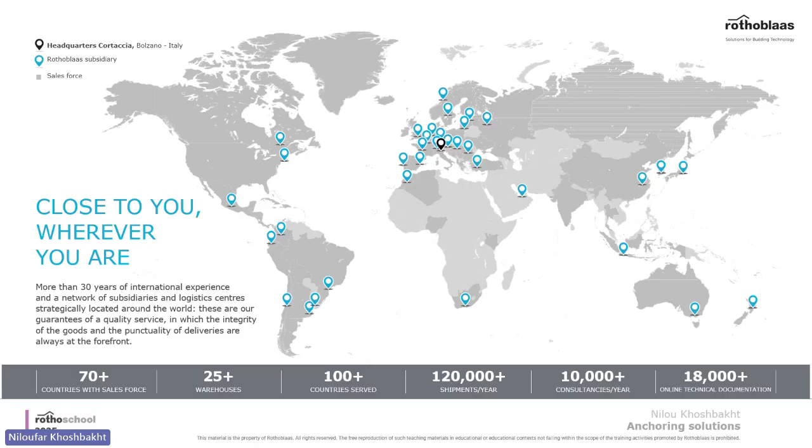A little bit about our company. We are providing solutions for mass timber construction all around the world. We have 25 plus warehouses serving more than 100 countries with our team of engineers and sales force. Specifically in North America, we have more than 1,000 clients, serving 60 states and provinces in Canada and US with 2 warehouses. If you want to learn more about the major projects we've touched in North America, you can go to Wood Innovation Network and search our name there.

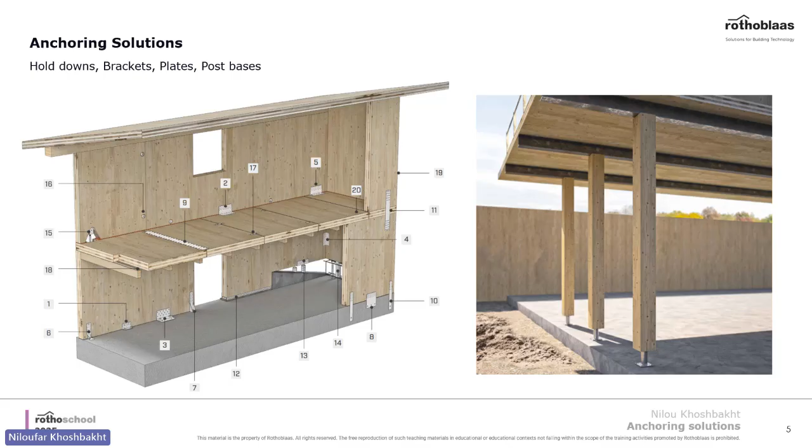Today we're talking about anchoring solutions: hold downs, brackets, plates, post bases, all means of connecting mass timber structures to the ground. Here's the outline for today. We'll talk about why proper anchoring is crucial, then about 5 types of anchors for mass timber, and a bit about Rothoblaas hold downs, brackets, and post bases, and some of our innovative ground connection systems.

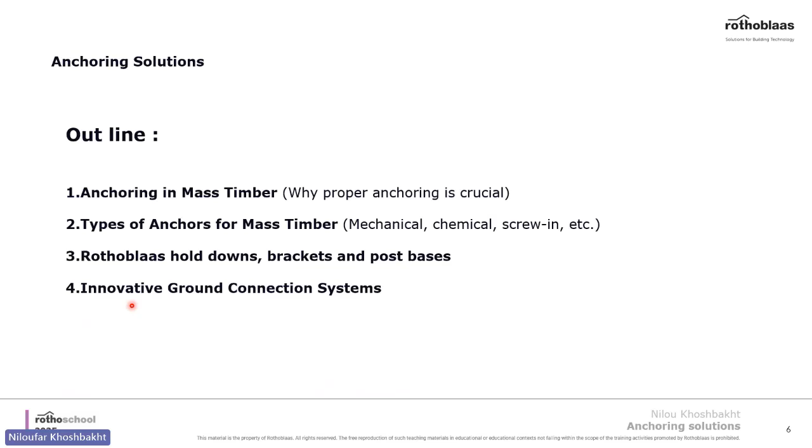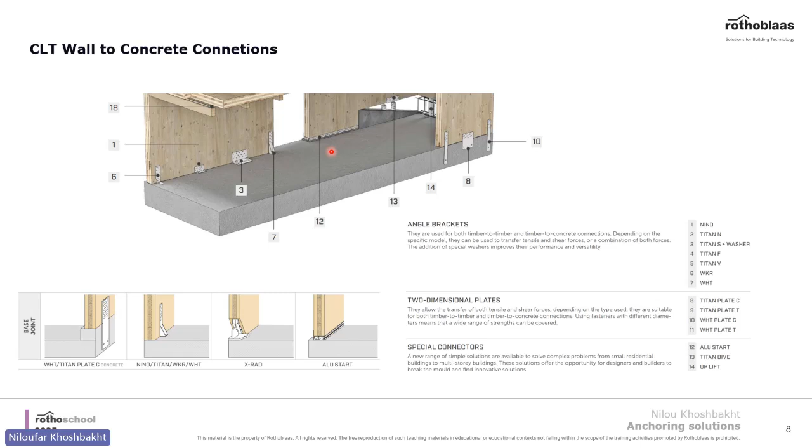We have a range of products for connecting CLT walls to the ground: angle brackets, hold downs like WKR, Titan plates and WHT plates, and some of our innovative ones like ALUSTART. We also have advanced innovative solutions like Uplift and Titan Dive that I will discuss at the end of the webinar.

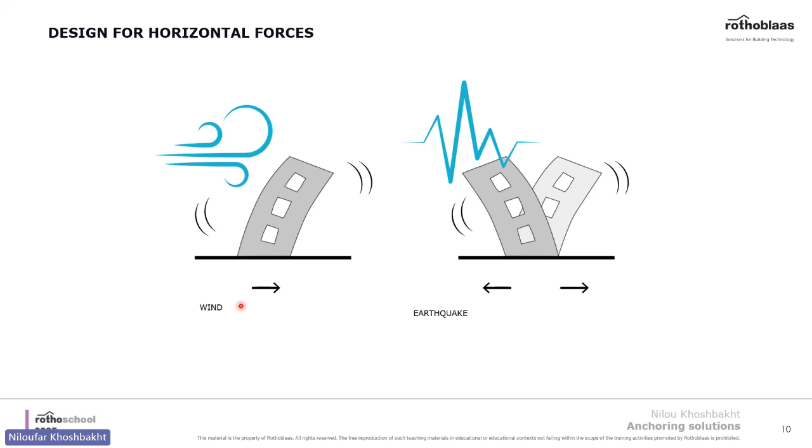But first, let's start with design for horizontal forces. This is a basic concept, not only in mass timber construction but in construction in general. When a structure is subjected to horizontal forces, like wind and earthquake, there are different ways the building could fail. We're not going to discuss how to brace the building; today our focus will be on the connection to the floor.

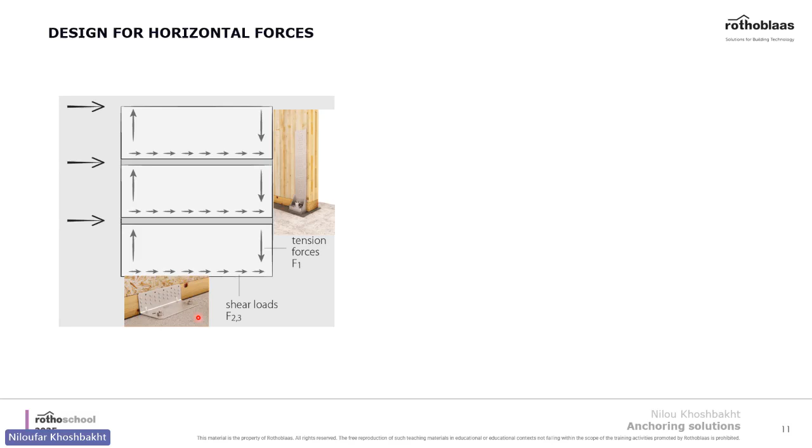For connecting to the foundation, the horizontal forces will be translated into moment, which in the end becomes shear forces on the floor or tensile forces. We resist tensile forces with hold downs and shear loads usually with brackets.

This picture shows a standard approach that's been around for a while, developed for light frame structures, where you just use tensile hold downs specifically for tension and shear brackets for resisting shear forces. This is a legacy system adapted from light frame buildings, and it works in theory.

But in practice, here's some experimental results from Gavric et al. As you see, these angle brackets not only withstand shear but also almost withstand tensile forces. Or even for the tensile hold downs, they just take a little bit of shear, as you see here.

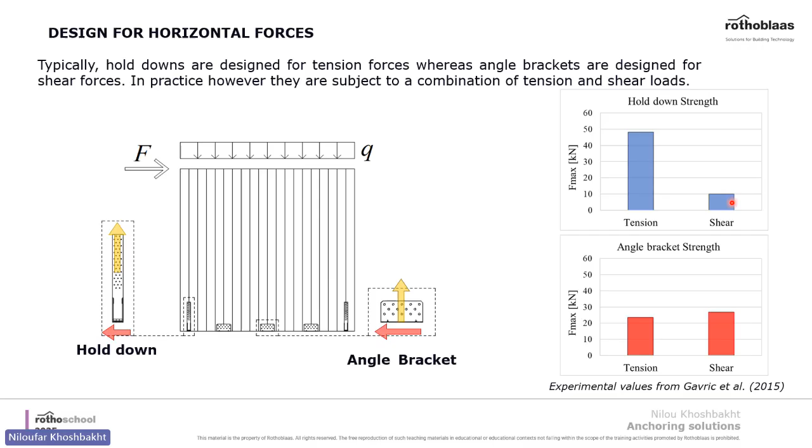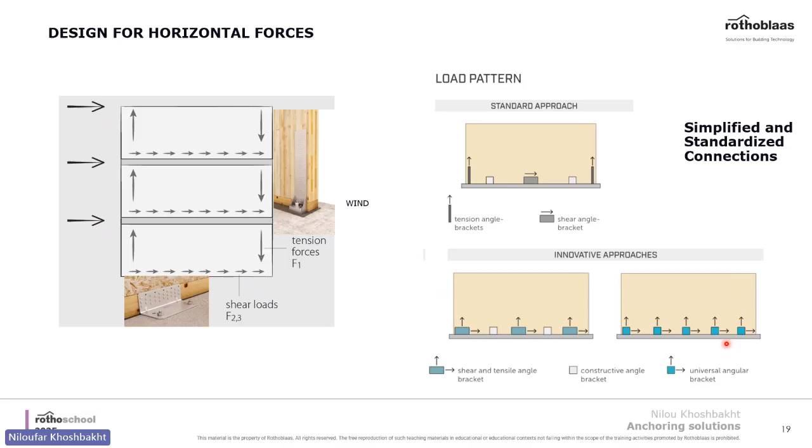That's why we moved to more innovative approaches in which angle brackets are optimized to take both shear and tensile forces. We've conducted several testing campaigns to develop new products, which I'll discuss shortly.

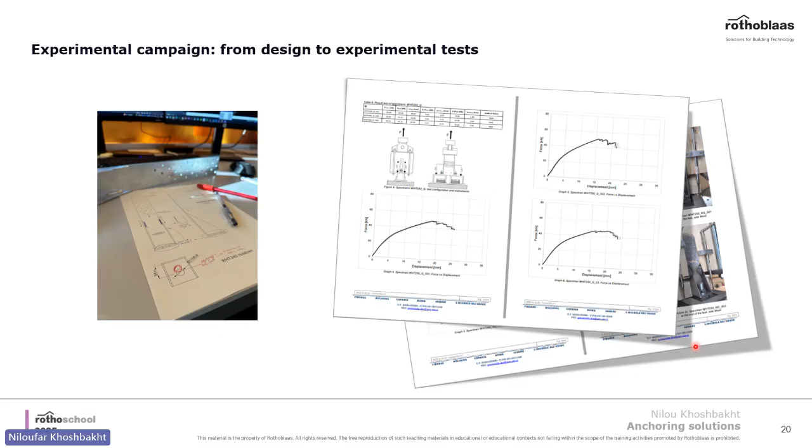But before that, I'd like to provide a bit of context regarding the design of hold downs. As you might remember from my previous webinar, a connection system is like a chain made of ductile and brittle components. We discussed the importance of the ductility layer before. I just want to emphasize we always want the screw in timber to fail first and be the ductile part of this chain, because if the steel or concrete fails, the whole chain will fall apart and the integrity of the connection won't be maintained.

Here you see an example of breakage on the steel side, and here breakage in concrete. This is the ideal scenario for us, because if the screw yields, the connection doesn't fall apart.

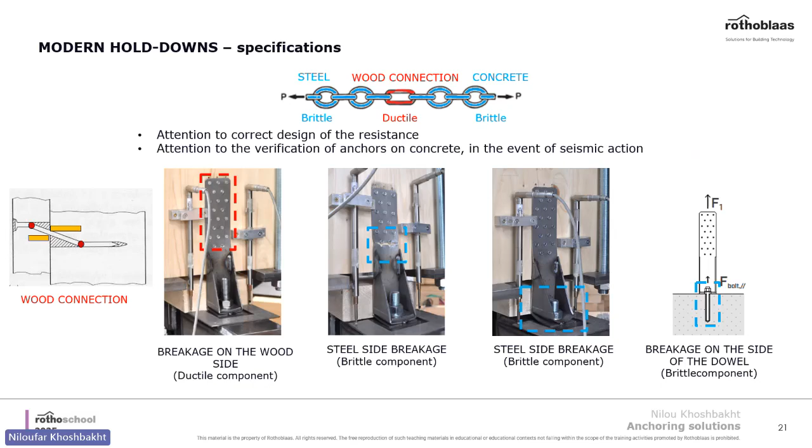This is our basis of the design and testing in Rothoblaas. Speaking of testing, this is just one example. I'm sharing results here for our WKR hold downs, and as you see, the failure happens in the timber side, and it's more of a ductile behavior.

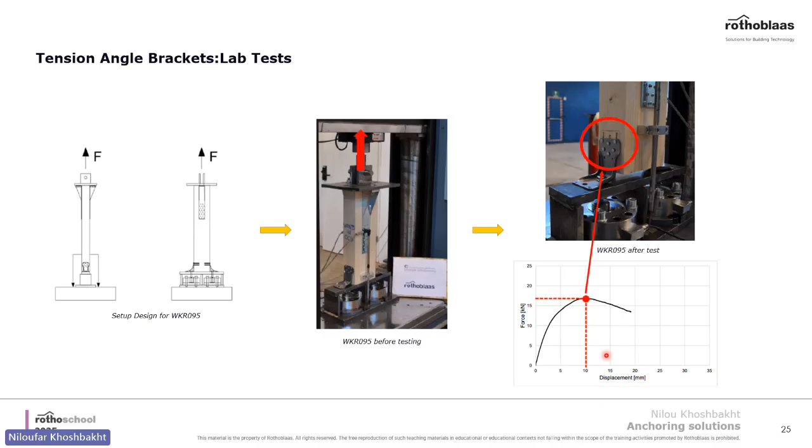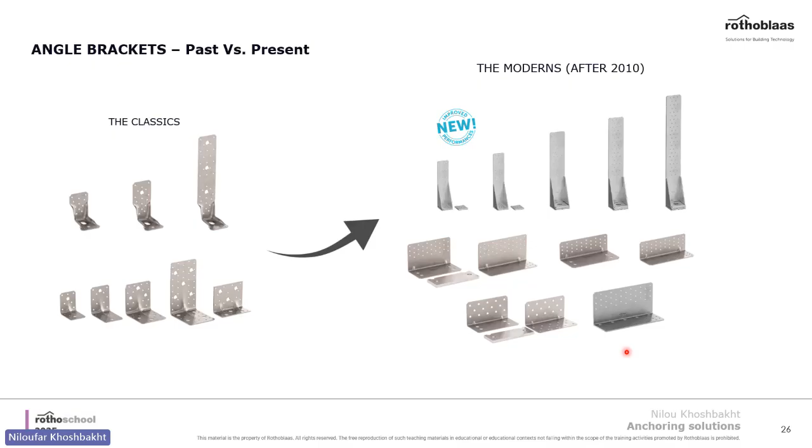What you see here is the classic brackets versus the modern ones. Small angle brackets have always been around, originated just to restrain loads in light framing. These modern brackets were developed by Rothoblaas about 15 years ago, and the performance was improved without getting taller. For example, for shear angle brackets, adding washers as reinforcement, changing the screw, the nail pattern, adding bigger screws, and it's still ongoing research boosting capacity for mass timber application.

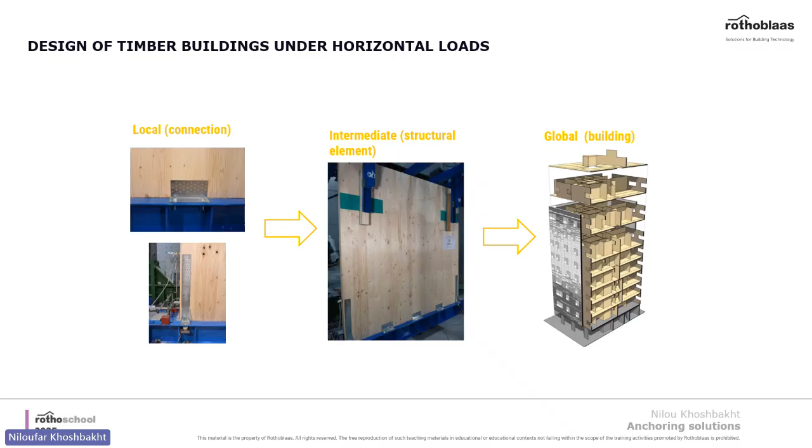We ran several test campaigns collaborating with universities to test the products themselves, both locally and as a structural element, to find a relationship between local and global ductility, which is used by engineers for seismic design.

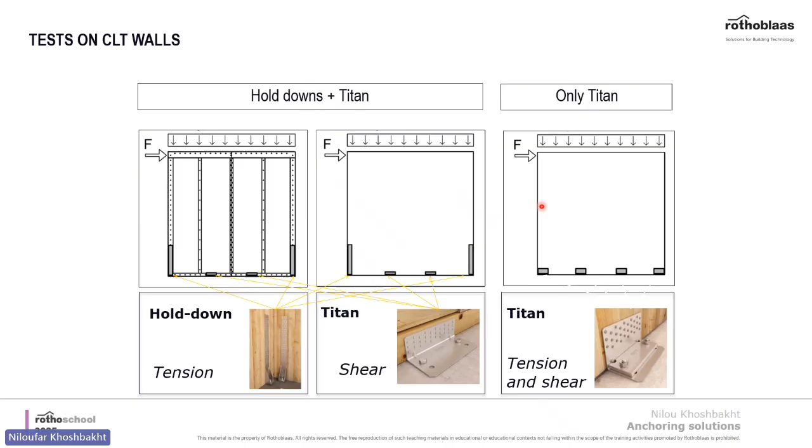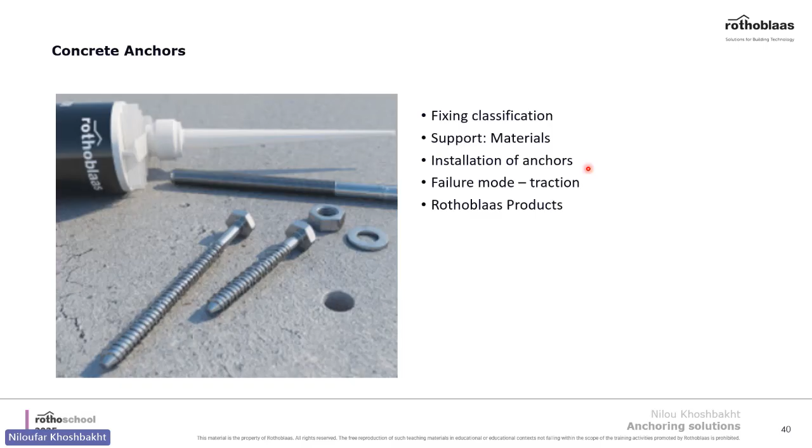All right, now let's discuss a little bit about concrete anchors, because anchoring to concrete requires precise selection of mechanical or chemical solutions, and we explored a range of solutions available from Rothoblaas. We'll talk about fixing, support material, installation, failure mode, and some of our products.

Fixing to concrete can be classified into two main categories. One is pre-installed fixing, which involves putting anchors during the concrete casting, and this is ideal for projects that require high load bearing capacity and precise positioning.

Then we have post-install fixing, for example our angle brackets can be used this way, or as you see here, we have threaded rod with XEPOX, where they drill the hole in the concrete layer and use XEPOX to secure the rod. This approach is more flexible, good for modifications after pouring concrete, or suitable for on-site adjustment and retrofit.

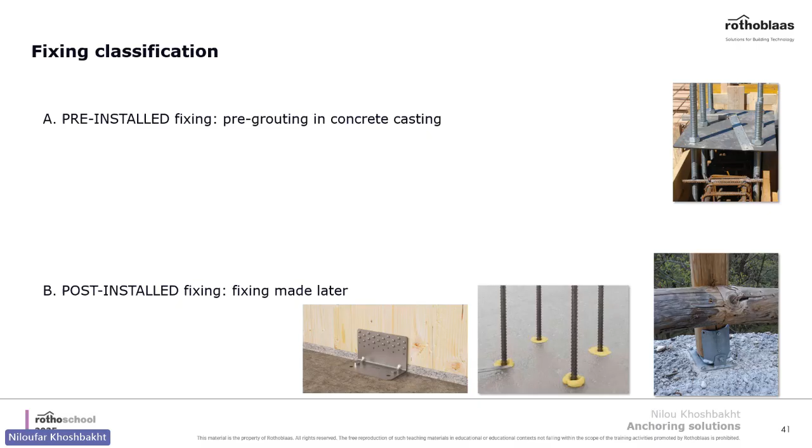The other thing is for post-installed combinations. There are different types of fasteners available. One is fixing by shape, which is anchoring through the concrete using SKR bolts, which cut the concrete and grab onto it this way.

But we have the other option, which is expansion. It works through friction, and the expansion in the concrete creates friction, and that's the way the anchor holds onto the concrete. The last one is just using chemical anchors, which bond the anchor to the concrete with some sort of epoxy.

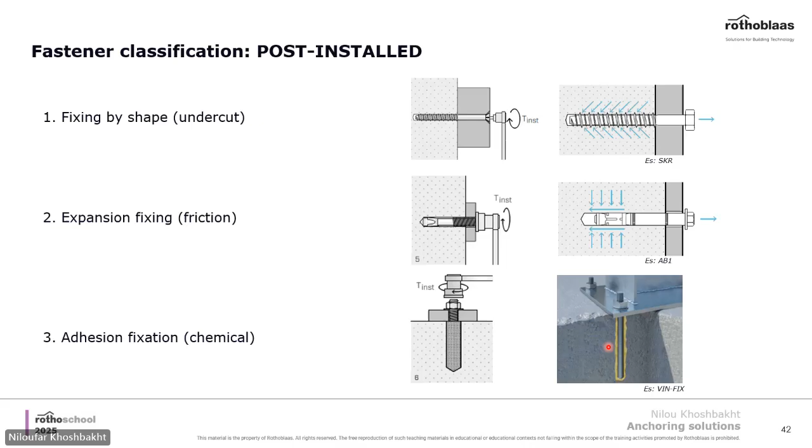Support material is really important for the choice of anchoring systems. Common substrates could be stone, which is dense but uneven. Then we have concrete, which offers more uniform and better load-bearing capacities. Then we have brick, which is reliable, but the hollow brick needs specialized anchors because of the voids, and sometimes you need custom-made anchors for this.

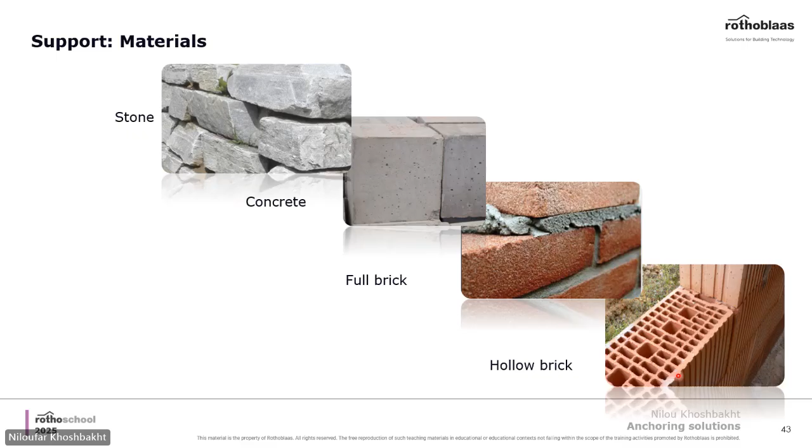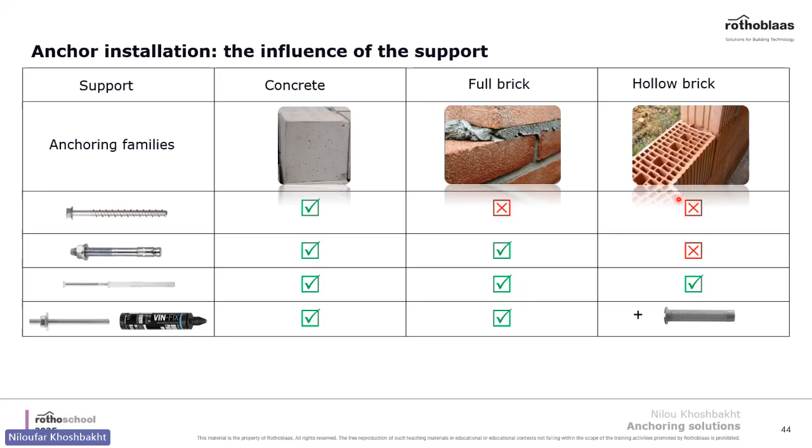Here's a summary table showing which anchors you can use with which support material. For concrete, you can use mechanical anchors and epoxy, no problem. For full brick, it's suitable for mechanical and chemical anchors, but screw anchors won't work here. For hollow brick, it needs a specialized way of anchoring, or the best way is to use a sleeve and epoxy, or make something specified to this hollow brick.

Regarding anchor installation mode, there are through and non-through. For through installation mode, the fixture and the substrate are anchored in a single step. This is faster and easier. But if you don't want any scratch on the fixing, you may want to do non-through, where you install the anchor first in the substrate and then add the fixing.

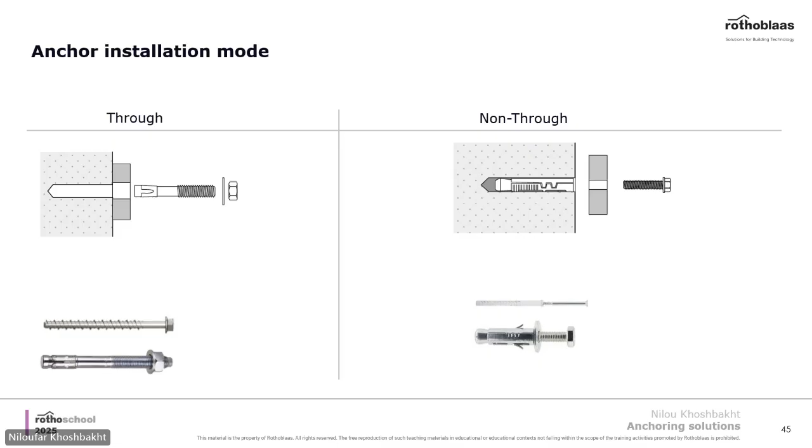These are some of the important parameters for anchor installation that help make sure the anchor is safe and efficient. Things like the thickness of the fixture, the diameter of the hole, the depth of the insertion, and the minimum thickness of the substrate.

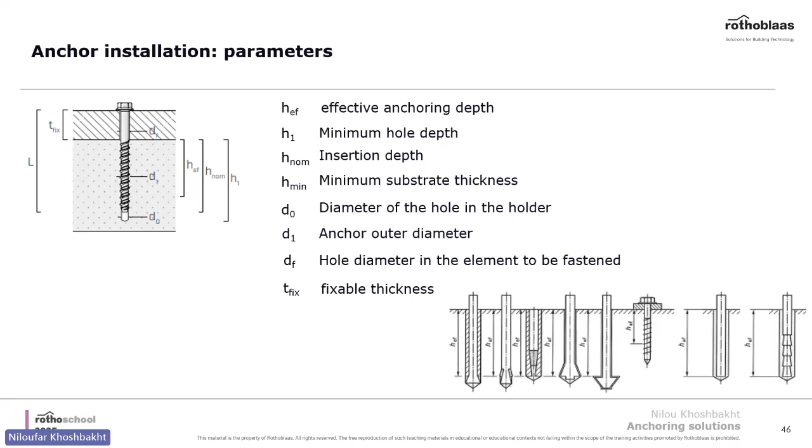There is one important thing I have to mention: the proper cleaning of the drilled hole. That affects the resistance of the connection. You can clean the hole with just regular brushes. The brushes for that are meant for this.

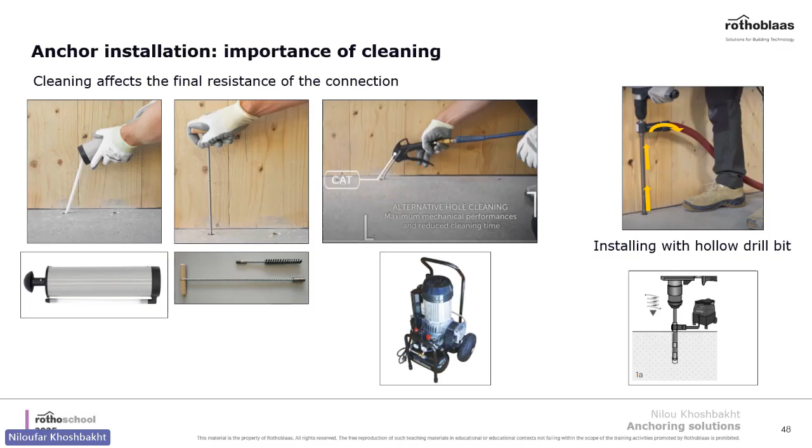To show you the importance of proper hole cleaning, they installed bars as you see in the picture, in a clean hole and a not-clean hole, and then did an extraction test. It showed that the hole that was not cleaned had 40% less resistance.

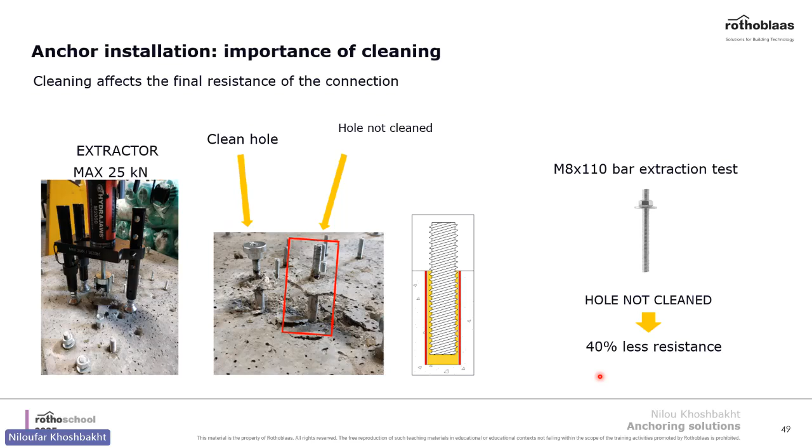We also have chemical anchors, which have two important parameters usually found on the back of the product itself: workability time and curing time. Also, the temperature at which you apply the chemical anchor is important. Workability time is the time in which the anchor forms a paste.

Curing time is the time you have to let it sit before applying loading to the connection. This time varies by the composition of the anchor, whether it's polyester, vinylester, hybrid, or epoxy.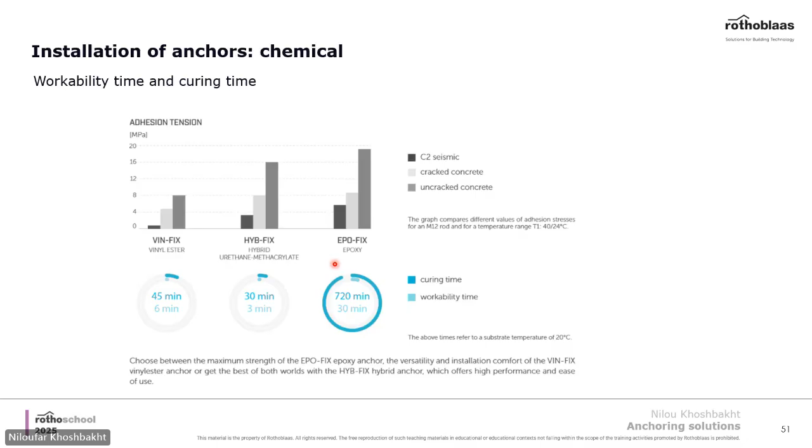In our catalog, we have a specific guide on how to use our anchors. It's all included in one table that you can use.

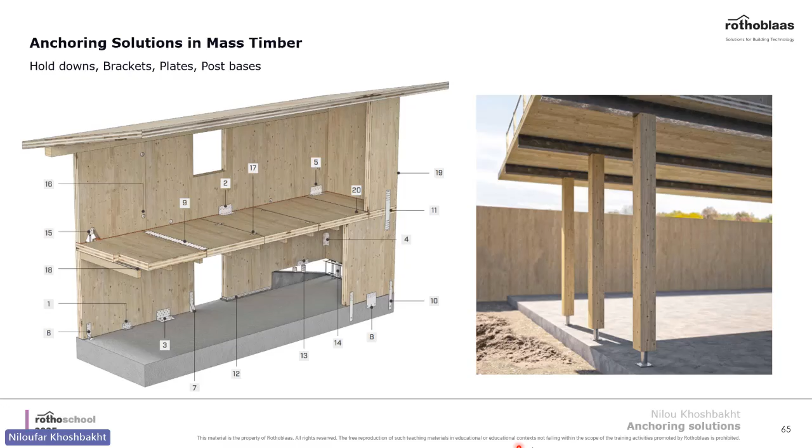For this part of the webinar, I'm going to talk about anchoring solutions. I'm going into the details of the hold-down brackets that Rothoblaas offers. Our hold-downs are divided into two main categories: shear and tensile brackets, and tensile-only brackets. These are like NINO and Titan products. And we have WKR and WHT for resisting tensile loads.

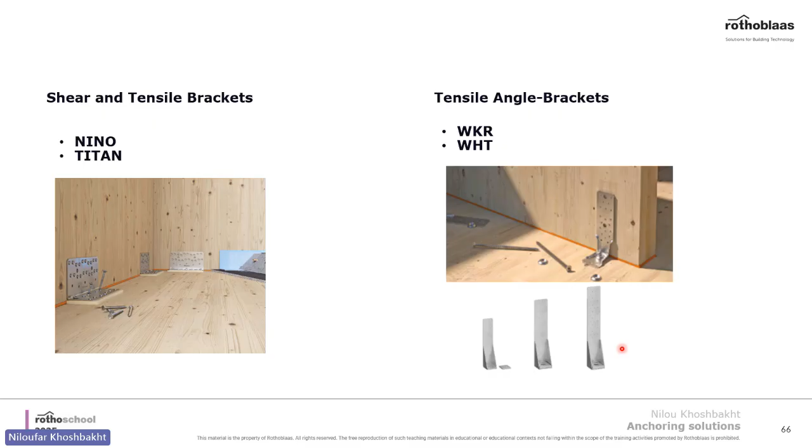For shear and tensile brackets, this shows a comparison table for the Titan family. Titan brackets can resist load in tensile, lateral, and shear. They're ideal for CLT, easy to install, and have certified values for partial fastening whenever you have an intermediate layer like grouting or something.

It can provide up to 19 kips in shear and 17 kips in tensile. And the height is not too high, so you can integrate it into the floor package.

I had this comparison table, which is not in Imperial units. I just want to say that we didn't have this table in Imperial ASD values. This is just for the sake of comparison, not ASD values. So I just want to mention what R sub K means here: it stands for characteristic resistance. This is only for comparison that I put this table together.

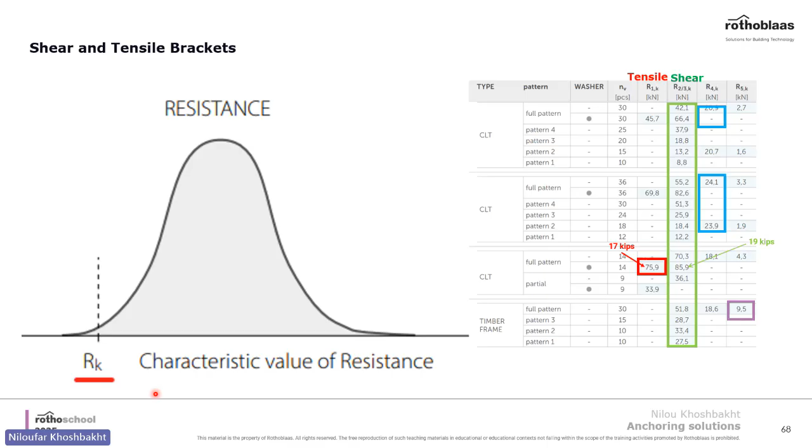I'm not going through the details of this. If you have questions, we can do it later, but I just want to mention what R sub K means in all these tables.

Regarding Titan N, we also provided two pairs of holes for connecting to the concrete side. Just in case there is rebar in the concrete here, you can just move the anchor to the other side.

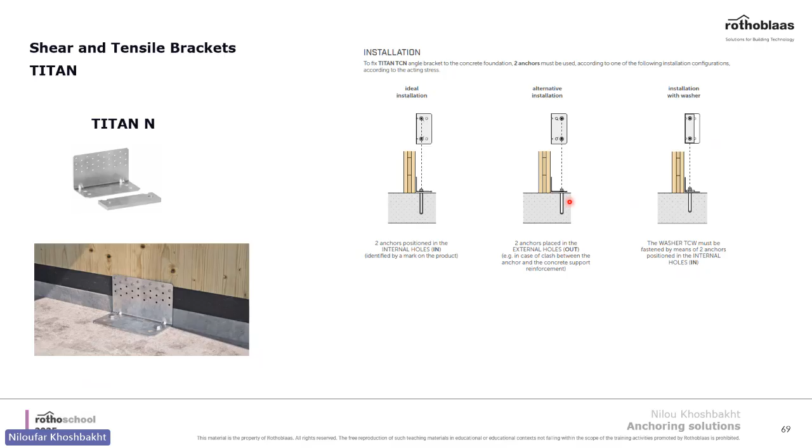All right, regarding Titan S, the good thing about this product is that we are using bigger diameter screws, 0.3 inch diameter, so we have less screws and you can use the screwdriver to make installation fast. It allows you to work comfortably on the job site with really good high capacities: 19 kips in shear and 17 kips in tensile.

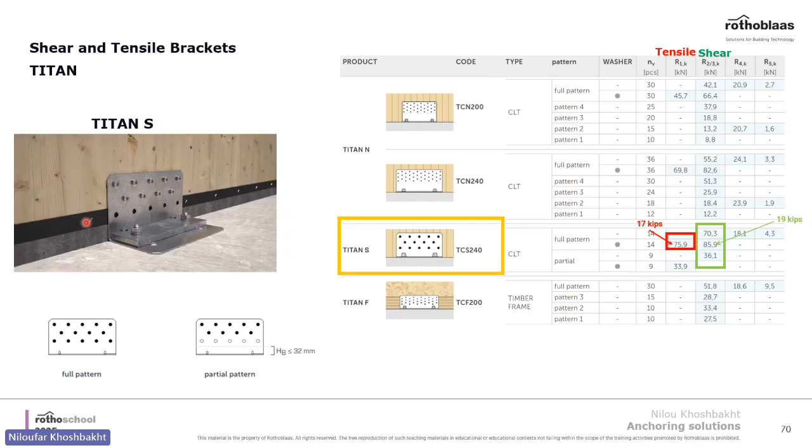Also, as you see, you can do different patterns if an intermediate layer exists. With Titan F, as you see, it's ideal for light frame structures. For example, if you want to connect steel floor to the ground, or if you have an intermediate layer like concrete grout, you can use the partial pattern, and you can get a shear value around 11.6 kips with Titan F.

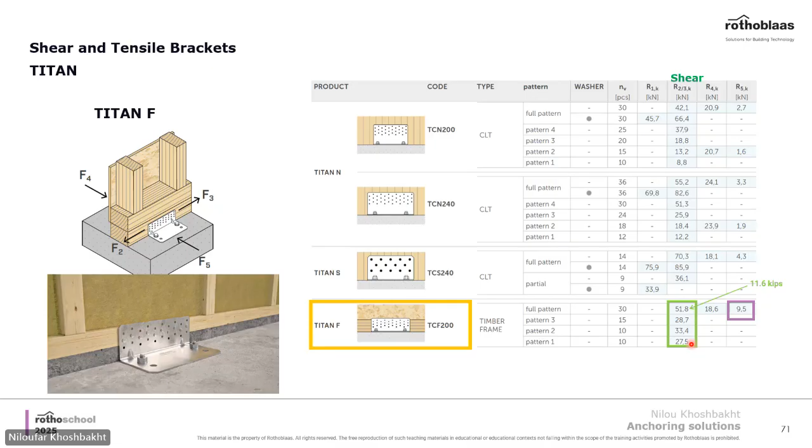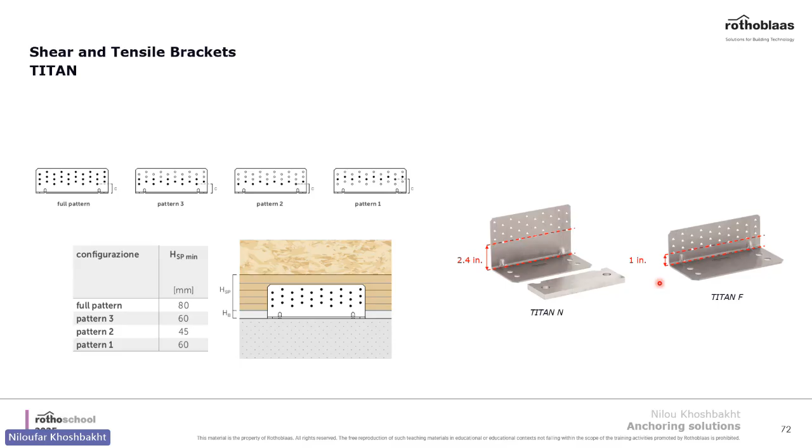And we have also Titan V, which has exceptional tensile and shear strengths. It also has different partial fastening capacities, especially, for example, when the wall thickness is different, you don't have to do a through bolt with Titan F. You can easily use the angle, the screw, and secure the plate.

The other thing is, for example, if you assume this is not CLT, just a regular post, you still can get good capacity assuming this layer doesn't exist. You cannot get really good capacity with vertical nails going directly parallel to grain, but you can get good capacity because of the angled screws here.

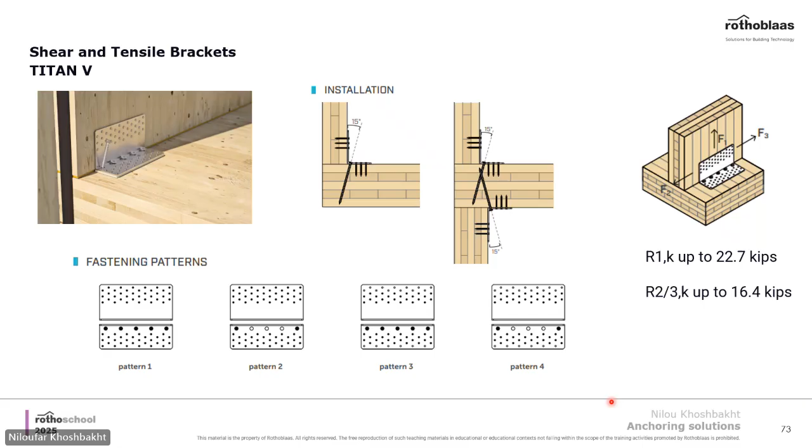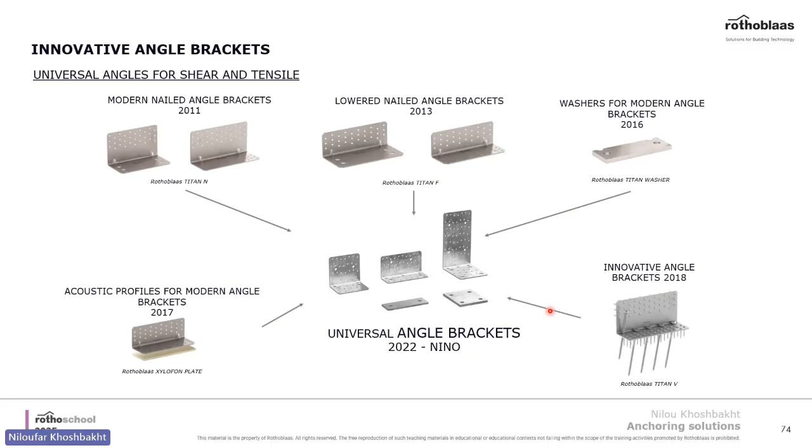This was all about our Titan angle brackets. This picture shows a little bit of history of how the Titan family evolved, like the nail lowered down, washers added to add to the resistance in tensile, and also how Titan V was innovated in 2018. But there was a gap between the regular angle bracket and these innovative ones, and that's why the NINO family was born, which also gives you good capacity.

For example, with NINO 100, you can get up to 7.8 kips, and it provides values in tension, shear, and lateral. Also, as you see here, for example, for this concrete curb, you have allowance of up to 5 inches for pouring concrete and can use it in a partial fastening pattern.

For increasing capacity, you can add washers here, which gives you good axial resistance. This was all about the NINO, and here we move to our tension-only angle brackets.

So tensile brackets, again, we have had them for a while. What's new in our new catalog is that we try to optimize them to get better values, as you see here. The blue ones are the new ones, with better strength values and less thickness, minimum material. And we even lowered the height, which helps with the installation.

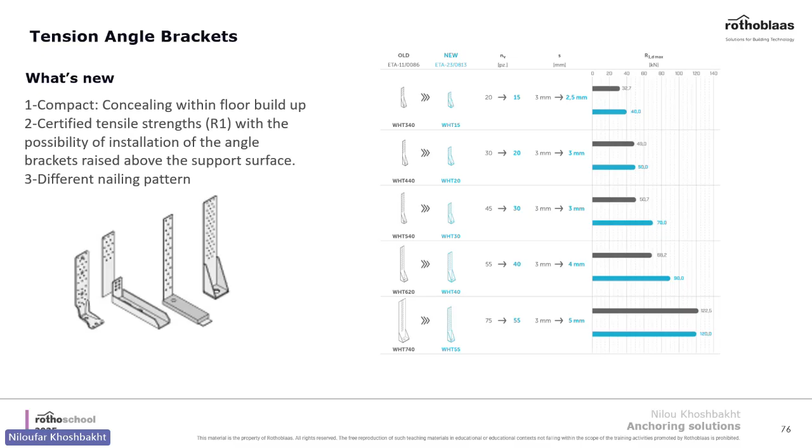And these are some of their tensile angle brackets, the WKR and WHT. As you see, you can get a height of up to 14 inches with WKR, using different partial patterns. And also, for example, for WHT, you can get up to 32 kips of tensile capacity.

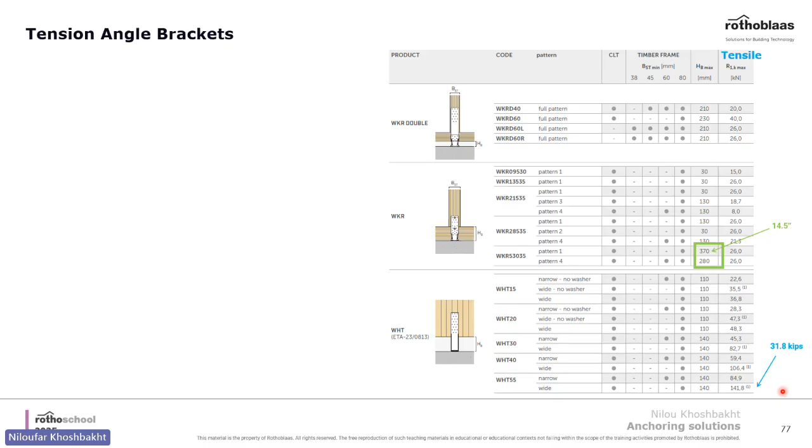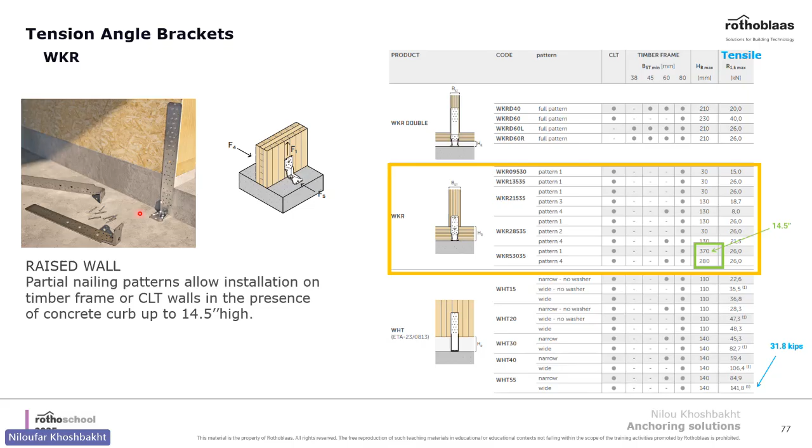Regarding WKR, if you have a raised wall, you can use partial nailing pattern. And as I mentioned, the concrete curb may be up to 14 inches high, and you can still use the WKR. This also shows that this product is certified to be installed with GAP. This is one of the applications as you see in the picture.

But when you do this, make sure you have to make sure there is a lock nut at the bottom. So if you just overturn the screw, the bracket doesn't go into tension before even being used.

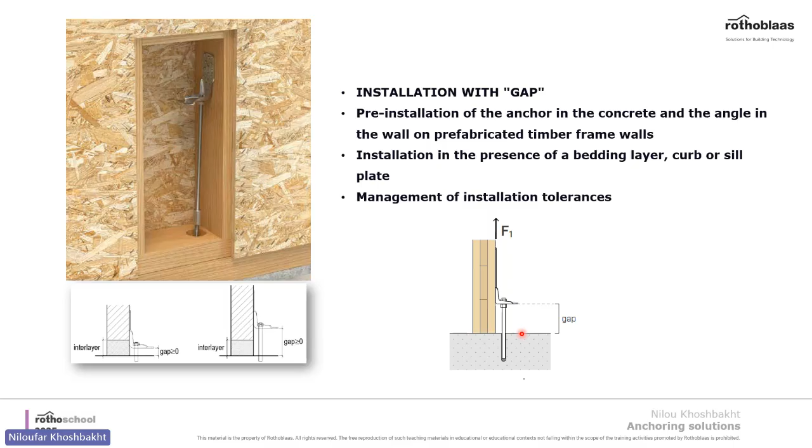Regarding our WKR double family, these are really good for prefabrication purposes because they are in two pieces. You can connect this piece in the factory to the wall and connect the bottom piece to the concrete before even the wall is on the job site. Another good thing is the minimum width you can use WKRs is 1.5 inches, which makes it ideal for light frame construction.

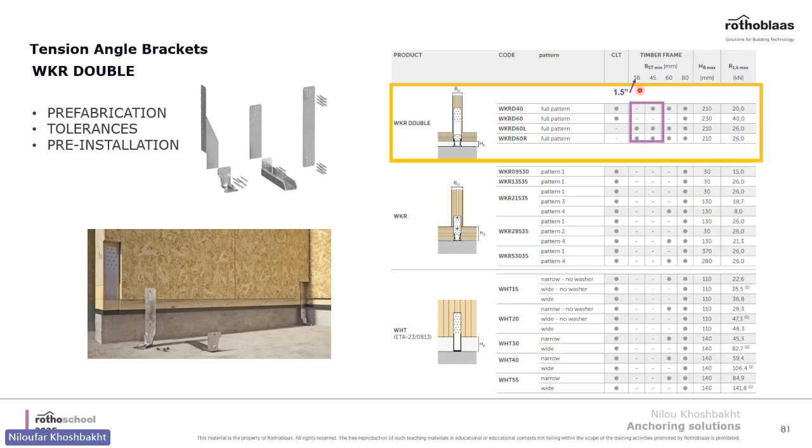This picture also shows the prefabricated wall and how it makes on-site management very easy. It also has slotted holes at the bottom that help with tolerances on the ground side, on the concrete side. For example, if you have rebar here or here, you can just adjust the hole, and then install the wall later and connect these two pieces together with nails.

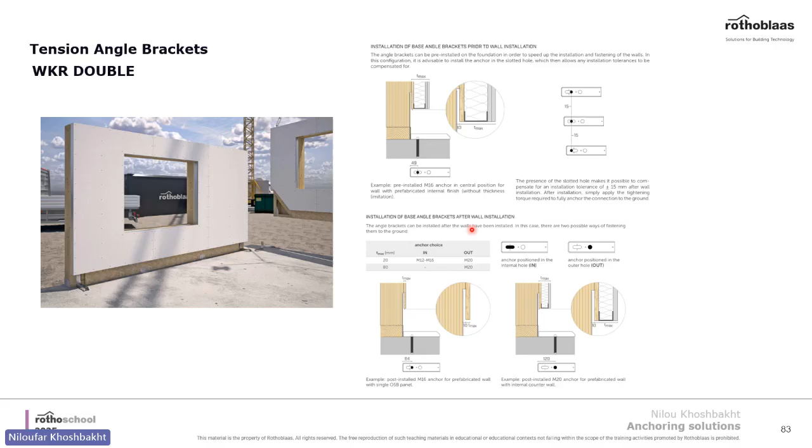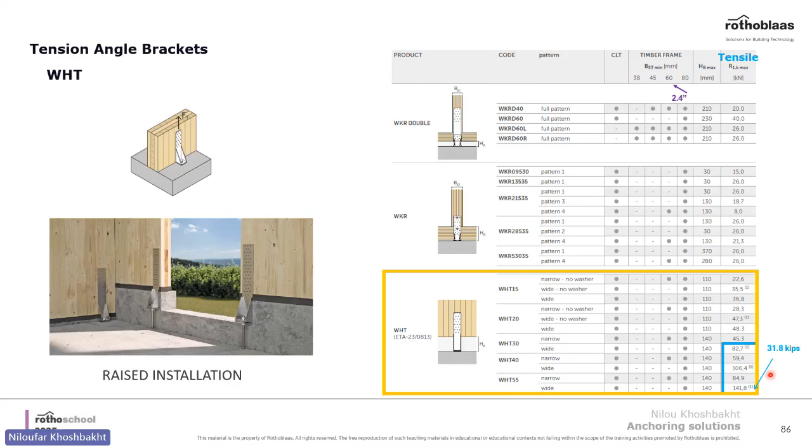And for the WHTs, it's available in different sizes. Again, we have a wide pattern and narrow pattern for nailing, and up to 31.8 kips capacity.

Regarding our plates, as I mentioned, they can be used in different construction systems. For example, if this is a light frame system, you can leave out the outer holes and use the pattern suitable regarding the minimum distances. This picture also shows that partial nailing is available. Also, if there is an intermediate layer of concrete curb, you can just use the nails above that, and there are capacities available for all types of installation.

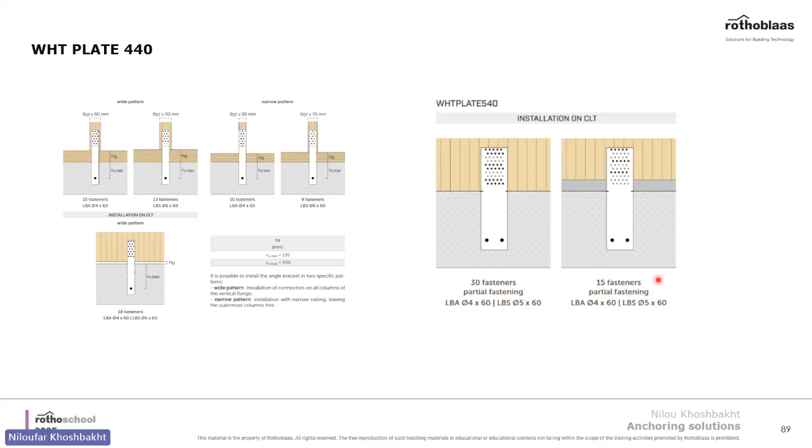All right, for this part, we're talking about post bases. We have adjustable post bases, you see here, and fixed post bases. All of them are suitable for outdoor use, and they're all designed for wet service conditions, specifically stainless steel and DAC coated that can be used by the sea.

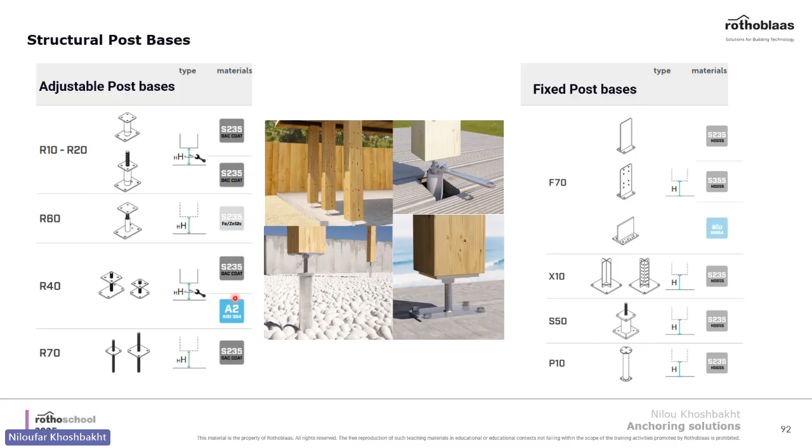In terms of adjustable post bases, we have R10, R20, and R60 family. These are height adjustable. The height range for R10 and R20 is 5 inches to 13 inches, and for R60 it's around 5 inches to 9 inches. They can resist the load both in shear, compression, and tension.

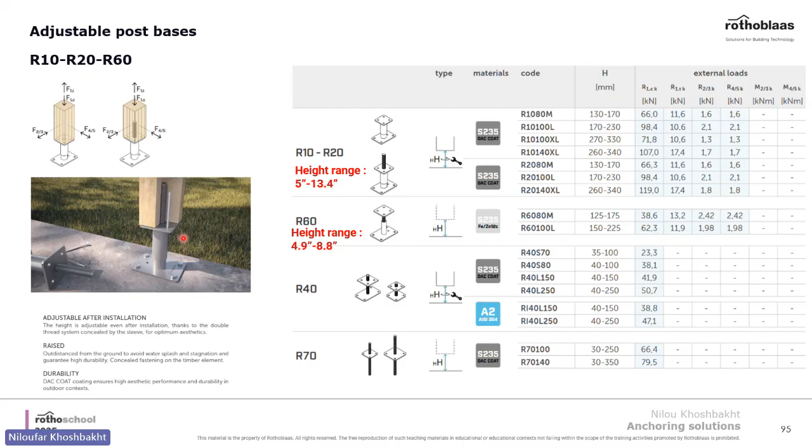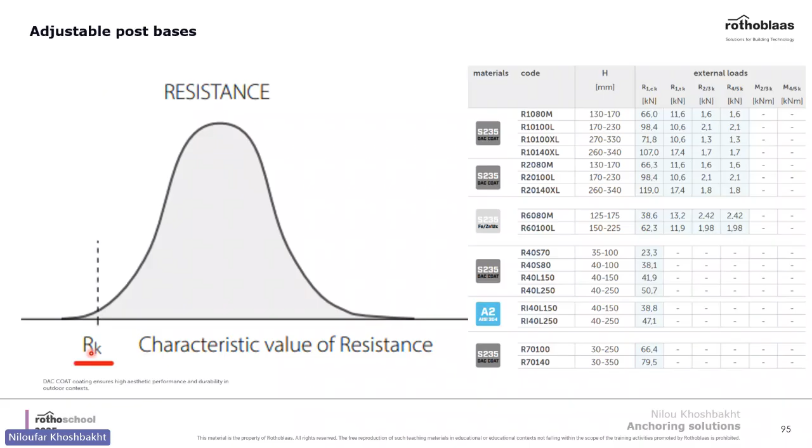This variability in height adjustability helps save the wood from the moisture in the concrete. And again, I just want to say that the values you see in the tables are characteristic values, as I explained before.

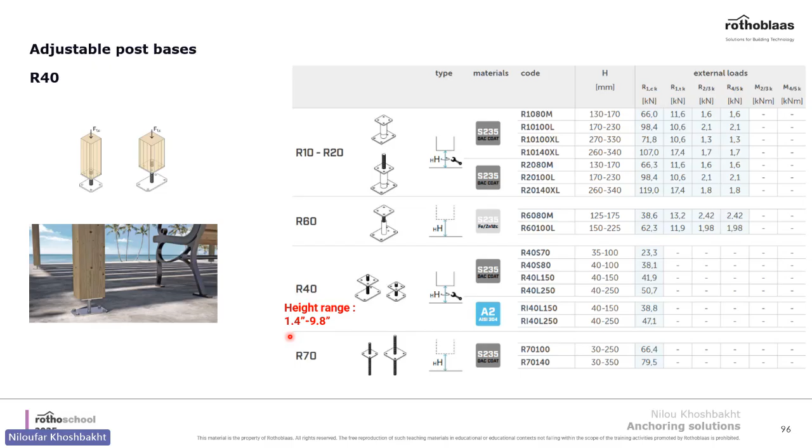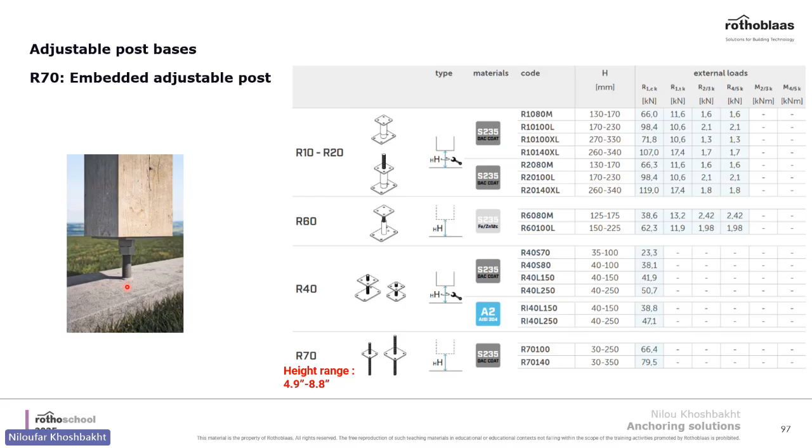We also have R40, which resists loads in compression only, and you can adjust it from 1.4 inches up to 9.8 inches. And in the end, we have R70, where you can connect this threaded rod to the concrete using chemical anchors. Still height adjustable, can be used for canopies and pergolas.

Then we have all these families of fixed post bases. These are T-shaped post bases, and of course they're all concealed connectors. Let's go through them one by one.

Then we have X10 post bases. As you see in this picture, it can resist moments in both directions. So, for example, for designing a pergola, you don't need to add bracing because of that. There are two versions of X10 post bases, one with holes, one without holes.

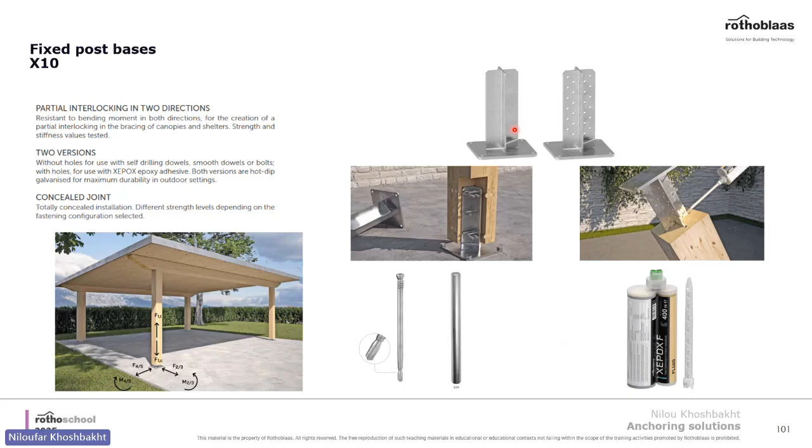We recently published ASD values for X10 on our website, and this comes from the testing, modeling, and formulations according to NDS and AISC, and it's all peer-reviewed calculations by a third-party engineer. If you go to our website, you can find the resistance in every direction, moment, and resistance in every direction for X10.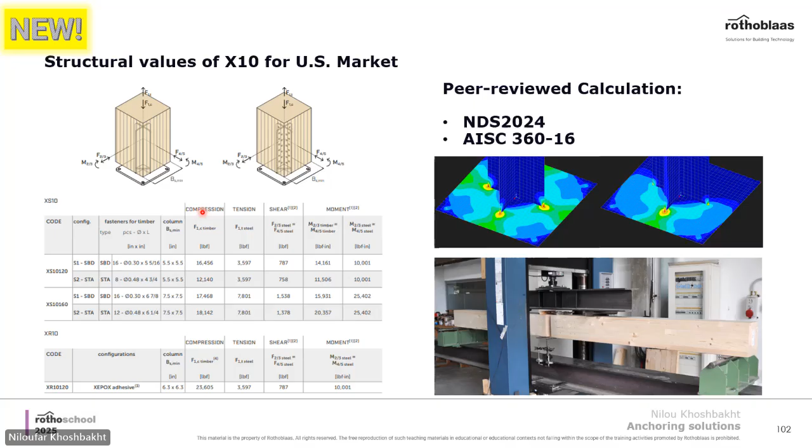We also have another new product for the US market, called R80100L. You may not find the datasheet on the website yet, but if you need more information, you can contact us. It's height adjustable from around 7 inches to 9 inches, and it's very easy to install, as you just install the nails on the side. It's also good for wet service conditions, and it has Florida building approval.

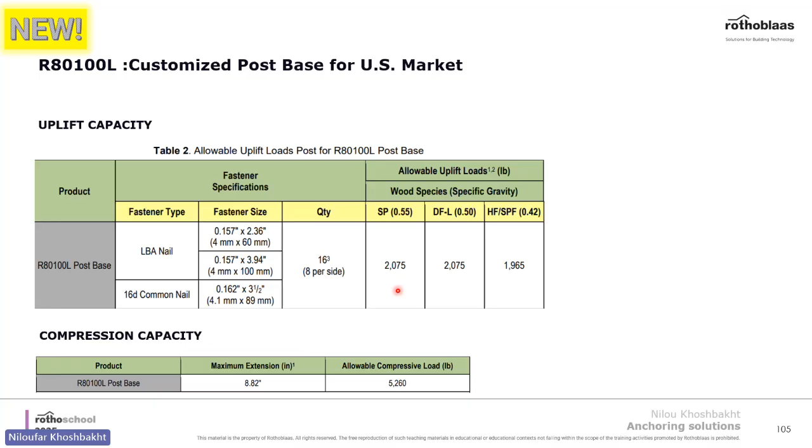The capacities for R80100L in tension are up to 2,000 pounds, as you see here. And for compression, up to 5,260 pounds.

One more thing about our R80100L is that we provided 4 holes for concrete anchors, just in case the minimum distances on the concrete is not met, you can use internal holes.

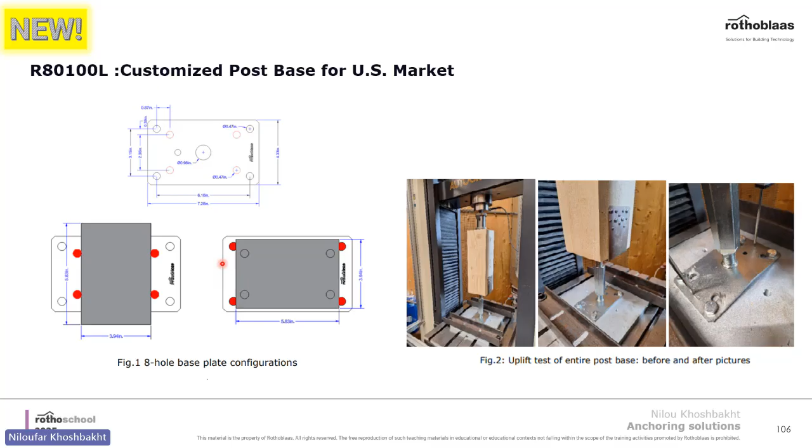Finally, I want to talk about our innovative ground connection systems. They were developed because of all the challenges and concerns during installation, and the challenges of connecting timber and concrete. This makes it more efficient for organizing the construction site and managing tolerances between concrete and timber. One is ALUSTART, the other is Uplift, and Titan Dive in the end.

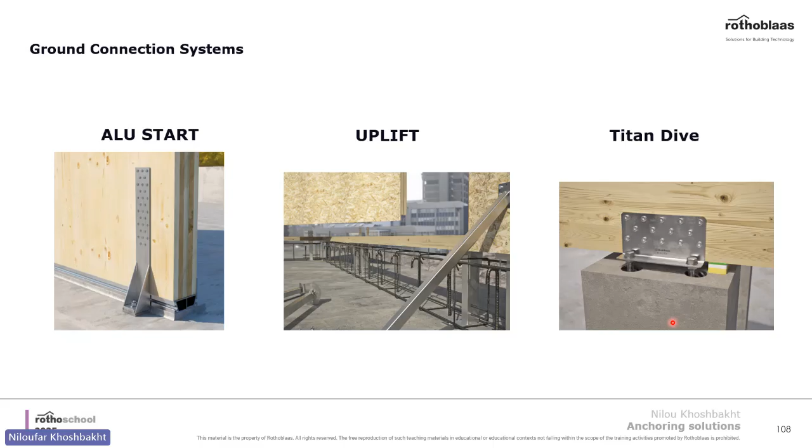Regarding ALUSTART, it's an aluminum profile in different sizes for different CLT thicknesses. It's a continuous hold down, and also it elevates the timber so it's not in direct contact with concrete, and it gives you capacity in compression, tension, shear, and lateral.

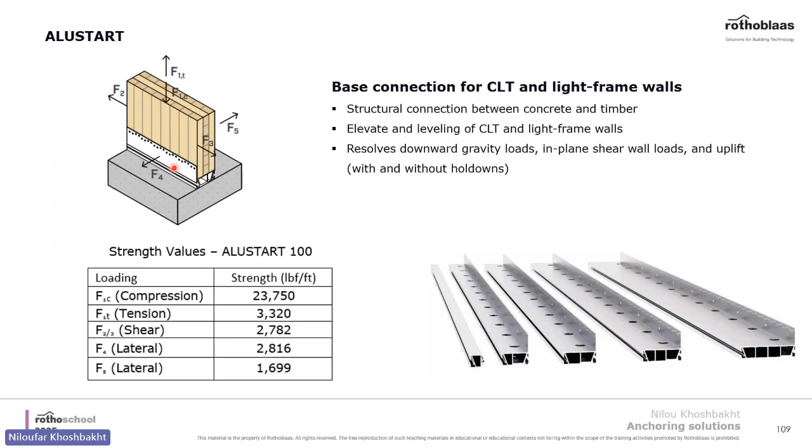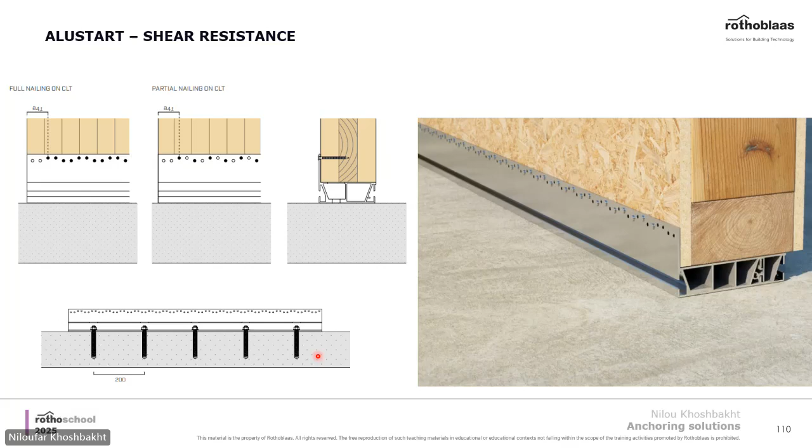As you see, we have nails for the timber side, and on the concrete side are concrete anchors. For adjusting the ALUSTART, there are 2 linear jigs and corner jigs.

As I mentioned, the concrete foundation is never level. Tolerances are in centimeters, but we have smaller tolerances on the CLT side. So there are adjustment screws that can be used to level the floor. Then there will be formworks on both sides, and they pour concrete to level the floor. Then the CLT will sit on top of it.

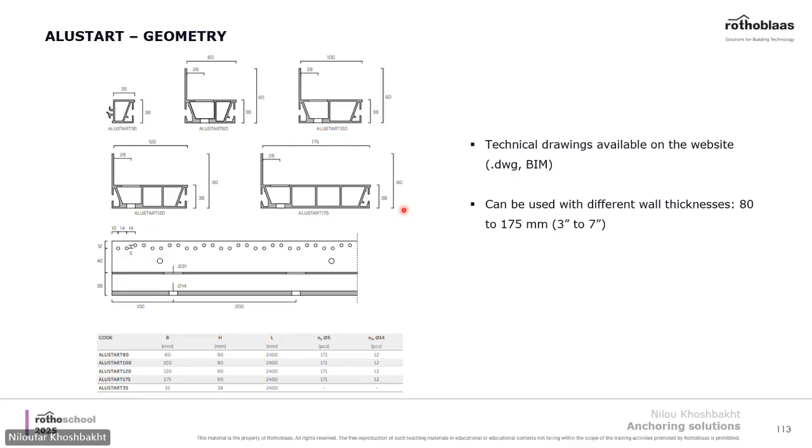These are different sizes of ALUSTART, from ALUSTART 80 up to ALUSTART 175, which gives you a thickness between 3 inches to 7 inches of CLT. As I mentioned before, you can use any kind of mechanical expansion or chemical anchors to connect it to the floor.

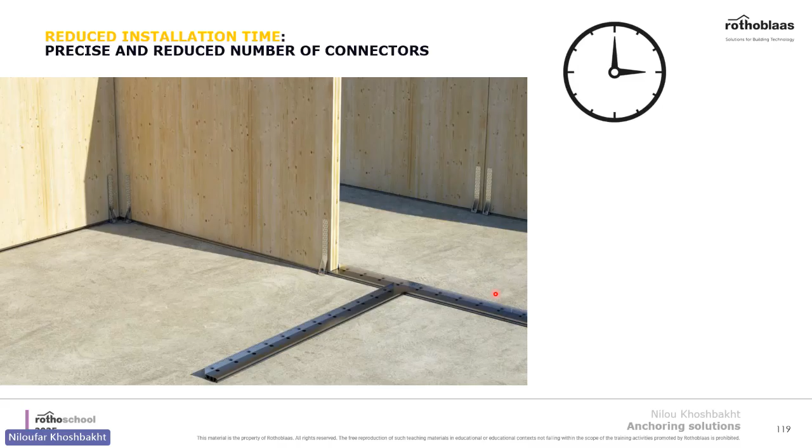You can also add hold downs if necessary. As you see here, ALUSTART can act as a map - you lay down a layout, then bring all CLT walls to the job site and install them. That really helps you with the timing. They can also be cut to any length on the job site.

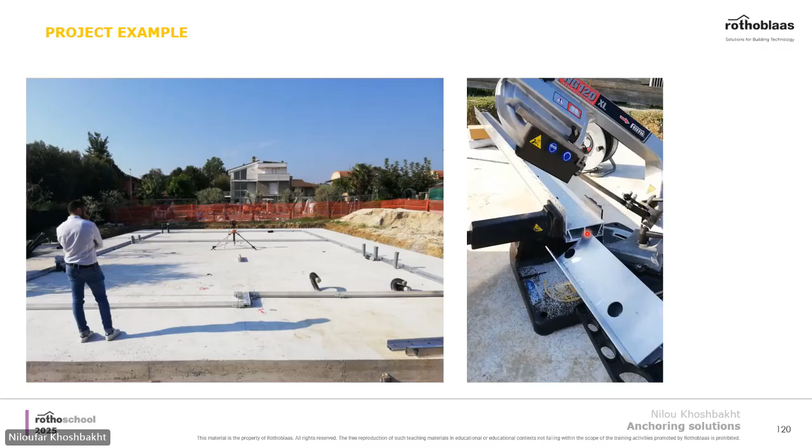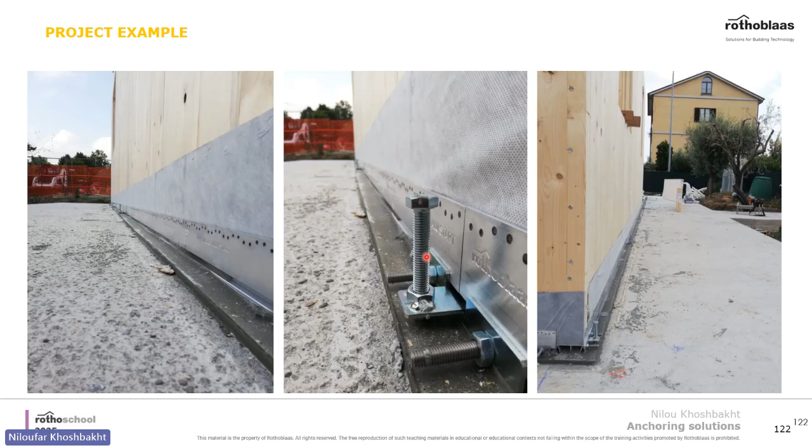Here's another picture regarding the adjustment and formworks, and how they pour concrete. This is the finished one, and then you can take out the bolts after adjustment is done.

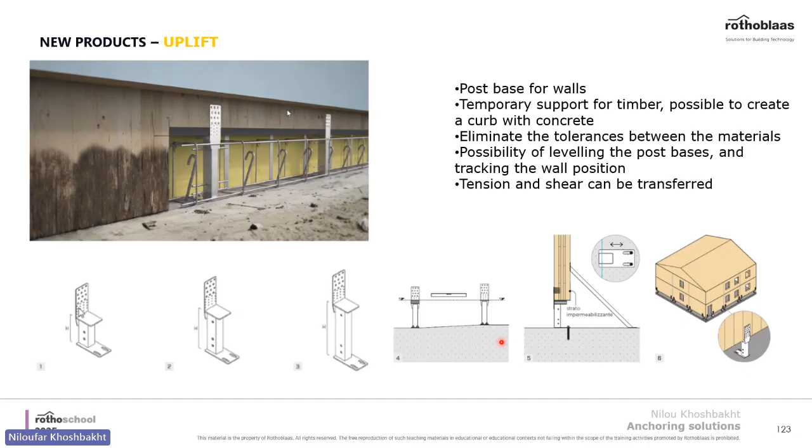Basically, you put the corrugated pipes in the concrete, pour the concrete, and then you can install the angle brackets later. This is a really good product for reducing alignment errors and allowing each stage of construction to be managed independently.